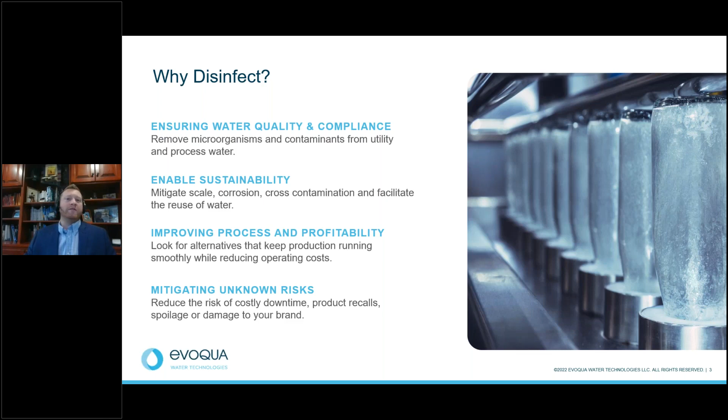Inline validations are simplified and easier to achieve by the known performance, which results in operating confidence. To overcome the challenges in a beverage processing plant, high quality, reliable disinfection systems that make their process repeatable are critical. Facilities cannot have a value outside of the regulatory ranges, as these hits jeopardize their product and pose a risk to health and safety of the consumers. New regulations are driving precision in the final safety and quality steps before bottling.

When reliability is limited, easy and quick maintenance is not possible, which drives up costs and creates more risk. There is constant pressure in facilities to prevent downtime and increase uptime to maximize their profits. With this, there is the challenge of how they can effectively gain feedback on their process and reliably validate this for reporting without compromising the time of the operators. Also, how can they balance the cost to operate by establishing a process that has less downtime to disinfect, more uptime to produce the product, thus increasing line utilization, optimization, labor, and material costs. For these facilities, what it really comes down to is a desire to focus on production of their product only, and not have to handle or solve the disinfection and sanitization needs.

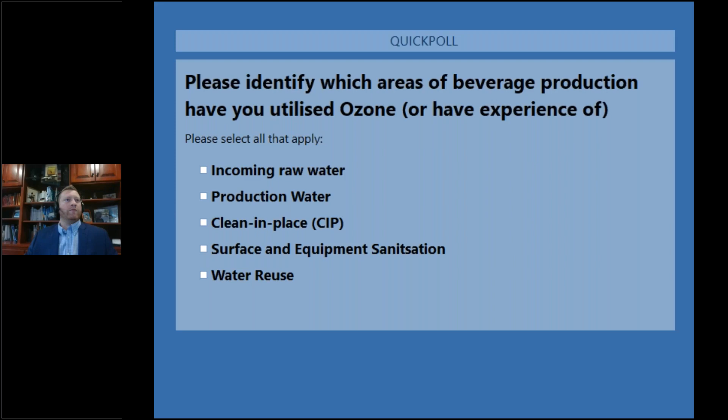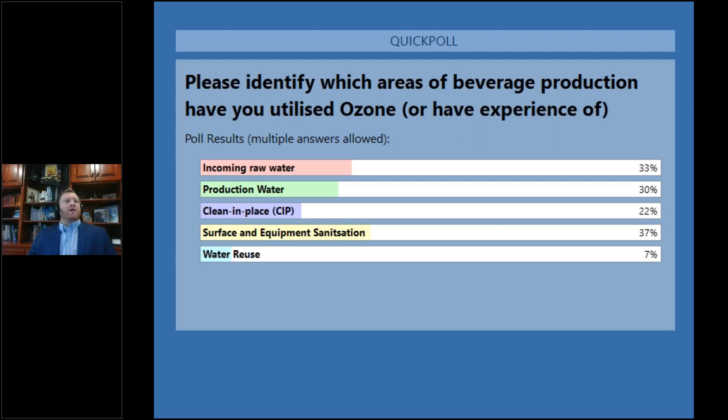As we were talking about the challenges we're seeing, you could guess that disinfection really can be the solution to these challenges. At Evoqua, the different disinfection technologies that we have are our ozone systems, UV, OSEC, analyzers and controllers, gas feed systems, and chlorine dioxide generation equipment, and more. Today we're focusing on the exciting topic of ozone disinfection.

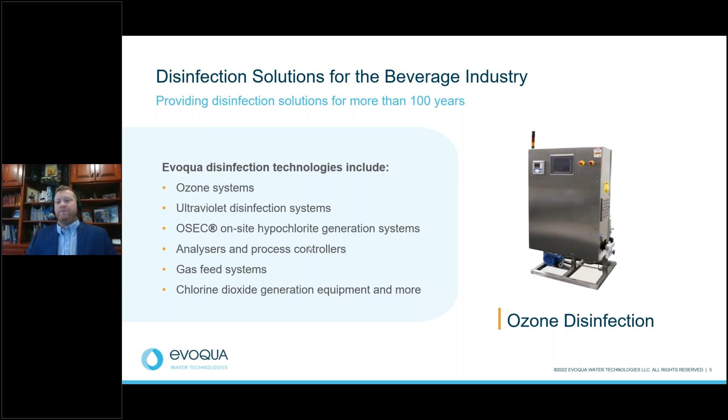We have seen, and this is echoed by operator feedback in our experience, how successful ozone applications can be. Throughout this presentation, we will see how ozone has the ability to reduce annual water consumption, in some instances more than you even thought possible. Even though the core elements of on-site ozone generation are air and electricity, best practices with ozone can actually help reduce the power consumption at your facility compared to some of the more traditional methods of disinfection.

With the quality improvements and increased reliability, ozone-based applications can see a reduction of annual process downtime, allowing you to produce more and be more efficient. The simplified designs of ozone systems, especially packaged ozone generation systems, can minimize maintenance, allowing your team to focus on your products and not worry about disinfection needs. And last, but maybe most important, the quality of your product will not be compromised with ozone. On the contrary, we've seen great success with customers who have reduced or eliminated microbial hits and have been able to distribute and sell more product without compromising quality when using ozone in their facilities.

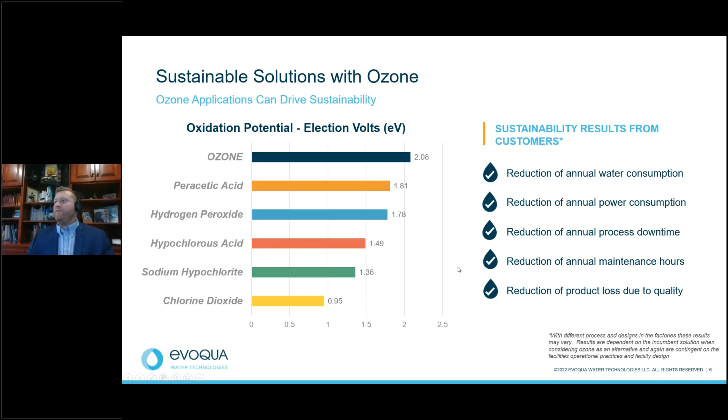For most beverage facilities, there's a growing need for sustainability. These facilities can leverage ozone to reduce water consumption compared to heat-based or chemical-based treatments. For annual water consumption in this facility, using a 5-step CIP ozone process, you can reduce annual water usage by 20% compared to chemical sanitization, or even more, 25% compared to hot water sanitization. Using a 1-step CIP process with ozone allows the customer to reuse their water source, reducing annual consumption of CIP processes by 93% compared to chemical sanitization, or 94% compared to hot water sanitization.

These calculations are based on a 4-cycle CIP process and may vary facility to facility. But what's really important is that when looking at a multi-cycle process, the ability to reuse water, which can be achieved with ozone, can significantly reduce water consumption.

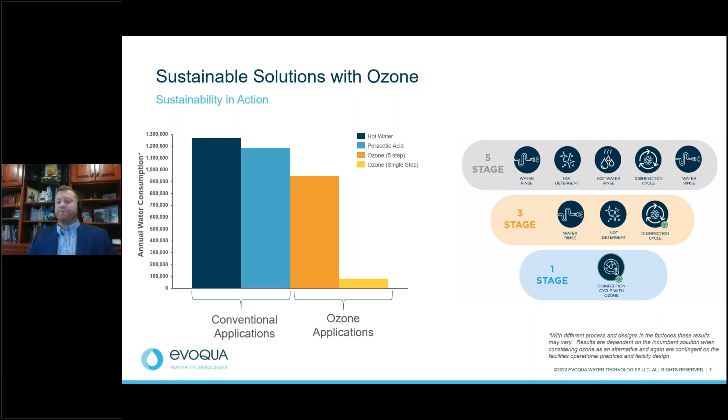Ozone can be used in many ways in the beverage industry for disinfection against microorganisms. These include water intake and processed water, product water production, disinfection of process equipment to prevent spread and contamination, surface cleaning and disinfection including disinfection of bottles, especially reusable bottles in the wash prior to bottling, disinfection of wetted parts of the water bottling equipment and machinery, disinfection of the surface of bottles and sealed caps of bottled water, and disinfection against airborne microorganisms that may be present in the air above the water bottles.

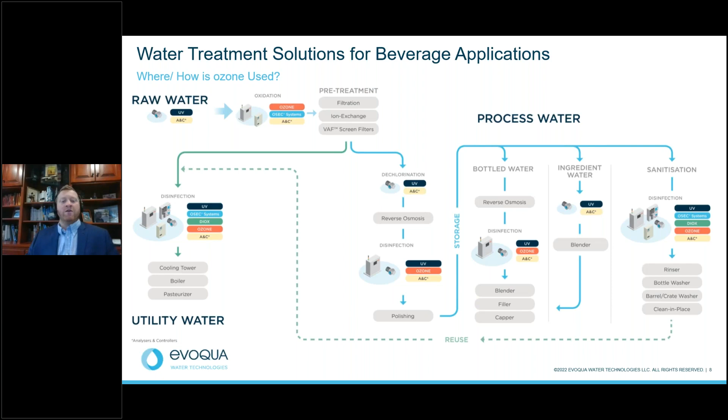So now we'll move into our second poll. Very similar to the first one, we're now looking at the future state. Please identify which areas of production you anticipate ozone being used in the future.

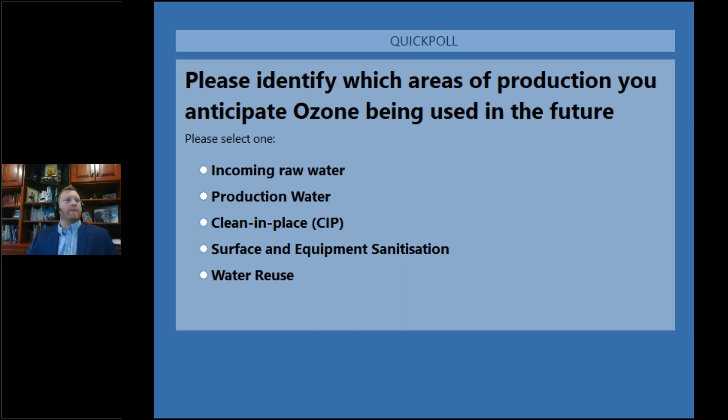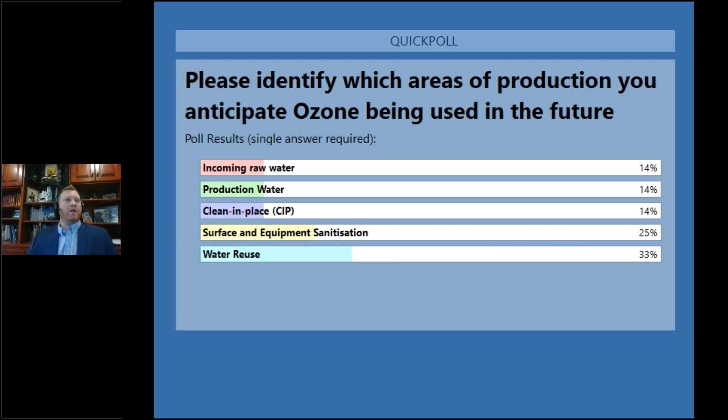It looks like we're going to be seeing a lot more people interested in surface and equipment sanitization and in water reuse in the future, which is very exciting. So with that, we're going to start to walk through some of the applications we see ozone being used in beverage facilities, starting first with water intake and processed water.

As we know, water is part of the product, if not the product itself, and water is used for several steps in the production and cleaning process. For many facilities, a key to sustainability is using non-potable water to reduce demand on local municipalities. Therefore, this processed water must be free of pathogens or impurities that could risk human health or product spoilage as it comes into the facility.

There is also an increasing need for process and product water to be treated to higher standards with additional unit processes to increase production cycles achievable before cleaning. Spent processed water is increasingly seen as an opportunity for point source reuse or to be used elsewhere in non-beverage contact applications such as washdown or CIP.

Wastewater reuse is growing in popularity as a source of utility water makeup, further reducing the freshwater needs of the facility. With all of this, the challenges of disinfecting the water are critical to the operations of the facility so that they can meet their production goals. With this, we see customers looking for solutions that are simplified and improve production uptime with less maintenance. They're also looking for solutions to automate the processes and ensure reliability in the facility while providing this sustainable solution.

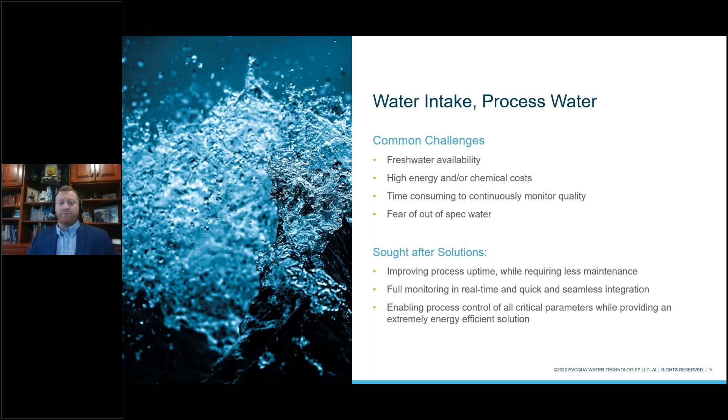With these needs in mind, Evoqua was able to provide one complete and self-contained package generator system to a bottled water filling process in California. This delivered a safe, tested, and qualified solution offering verifiable results via real-time monitoring of concentration. This solution offered key safety by keeping ozone off-gas below the minimum levels while still maintaining the HACCP regulations for bottled water.

This was achieved with the trouble-free approach of the package generator system. When leveraging ozone disinfection, it is important to dose the right amount of ozone for sustainability, quality, and safety. This can be achieved with real-time monitoring of the treated water by utilizing an integrated control logic to chase the desired residual set point. With ozone being generated on-site, it can reduce production downtime as you can ensure you have the level of disinfection when you need it, creating a reliable solution.

This simplified solution helped improve the customer's efficiency, driven by their sustainability goals, and with a short-term return on their investment.

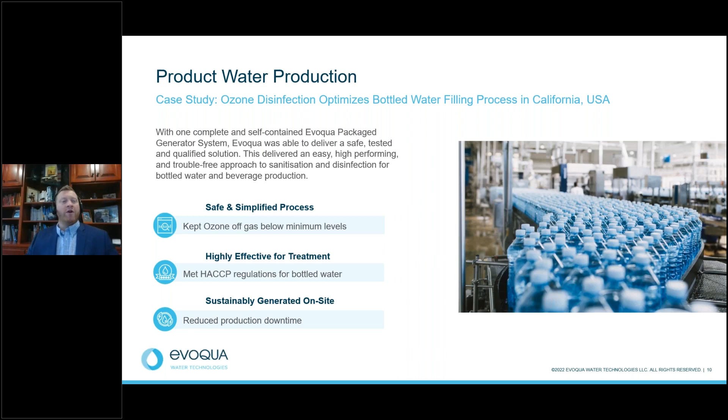Another application here is clean in place, also known as CIP. This is the method for cleaning the interior surfaces of pipes, vessels, and process equipment without disassembly. The washing process traditionally consists of several cycles in which detergents, caustic, acid, and rinsing materials are recycled through the process equipment via an automated system of tanks, valves, pumps, and heat exchangers, all managed by a programmable controller.

So again, there's a lot that typically goes into these applications to really help drive the reduction of labor and the disassembly of the equipment to still provide the disinfection.

Now, while conventional chemical CIP significantly reduces the time and cost of system sanitization compared to manual cleaning, elevated temperatures and chemical detergents are often required for complete effectiveness. As a result, significant amounts of energy, water, and chemicals are consumed in traditional chemical CIP processes.

Solutions, therefore, need to prevent the spread of contamination and reduce the risk of microbial growth in product water, or even the potential of recalls, which are becoming more and more prevalent nowadays. Consumers and users are also looking for solutions that are sustainable and environmentally friendly, where the runoff water is extremely clean but can still provide overall plant sanitization by reducing overall microbial load.

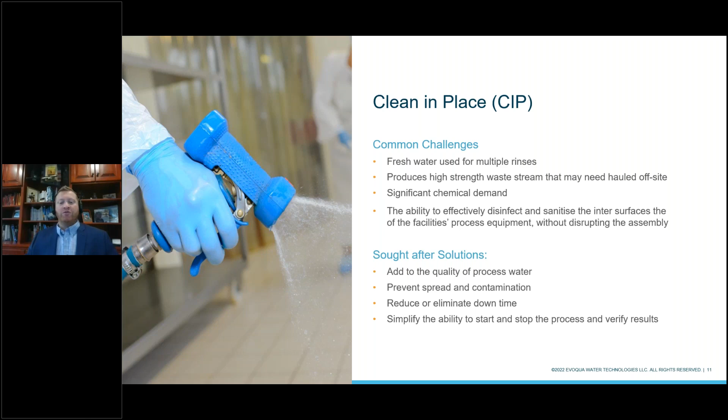So with that, we look at an example here where ozone injected water can improve the effectiveness of CIP because it is a very powerful oxidant and works well at reduced temperatures. Conventional high temperature CIP processes require significant energy and time to ramp the entire system up to the target temperatures and then cool down at the end of the process.

Ozone injected water can replace chlorinated sanitizers, peracetic acid, and hot water rinse in traditional CIP protocols. When ozone replaces chlorine, hot water, and steam, it can save energy and reduce the carbon footprint. It reduces the chemical usage and challenges associated with the disposal of these chemicals, and it can reduce storage risk, because the ozone is being generated on demand.

This can result in a solution that can be 20 to 85% less expensive than hot water sanitization based on the weekly needs of the facility. In addition, the use of ozone can significantly reduce downtime via the length of time out of service, even with a CIP process.

So looking at the CIP processes from a traditional standpoint, for hot water use, the process can be about 3 to 6 hours of downtime. For chemical processes, this downtime can be 2 to 4 hours of contact time, but overall, sometimes more than 12 hours of total time.

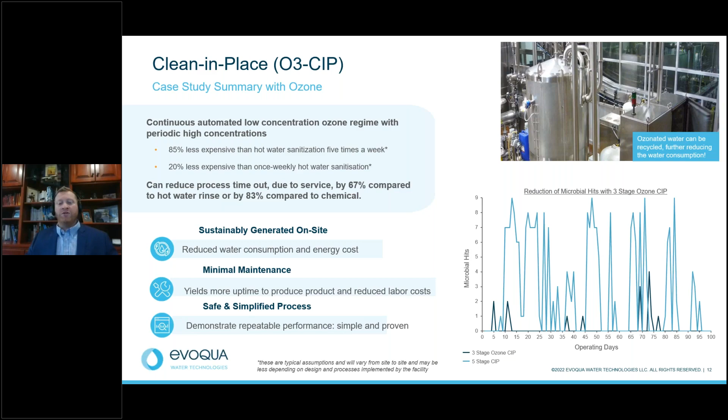And then the last application here is in surface cleaning and disinfectant. Surface cleaning and disinfection is a critical part of meeting the quality and regulatory needs of a facility. Today, many plants depend on chemicals to achieve these values, which can be costly and have many other impacts on downstream applications. Thus, we see customers in this market looking for alternative solutions that leave no residual, which ozone does with its short half-life, while still producing the disinfection to ensure the quality of the product.

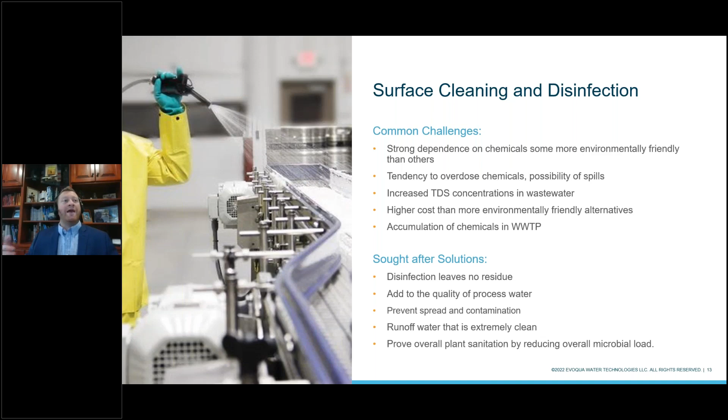The desired solutions here are very similar to those that we just talked about in the clean in place process, but it's really important to think of this part separately, because microbial hits on the surface of the process can have just as much of a negative impact as a hit on a process line. So when thinking about disinfection in your facility, it's important to think about all the places where disinfection should and can be used to help reduce microbial hits.

So when using the ozone generation system versus a traditional foam process, we can actually see some clear savings in water and time for that application. At one of our sites, the customer was looking to replace their surface disinfection process for their 4 fillers. The incumbent foam process required 2 rinses at about 1,300 liters per rinse and at 3 different passes.

When we then switched it over to our ozone-based application, that process required only 1 pass at about 1,900 liters. Also comparing them from a labor perspective, the foam process's 3 passes required 7, 8, and then 7 minutes of cleaning, while the ozone process only required 1 pass at 10 minutes, which again was applied over the 4 fillers. The net here was that the customer was able to save over 3,000 liters and 48 minutes of labor with each filler cleaning cycle.

So you can start to think about over the course of the year how much that will add up in sustainability efforts, cost reduction, and labor reduction, allowing the team to focus on what's most important in their facility. And for another key account customer of ours, we were able to monitor a continuous 24/7 low concentration ozone regimen with periodic high concentrations. This approach provided significant operational improvements, including clear ROI to heat-based treatments, thus demonstrating how sustainable ozone applications can be by reducing water consumption and energy costs.

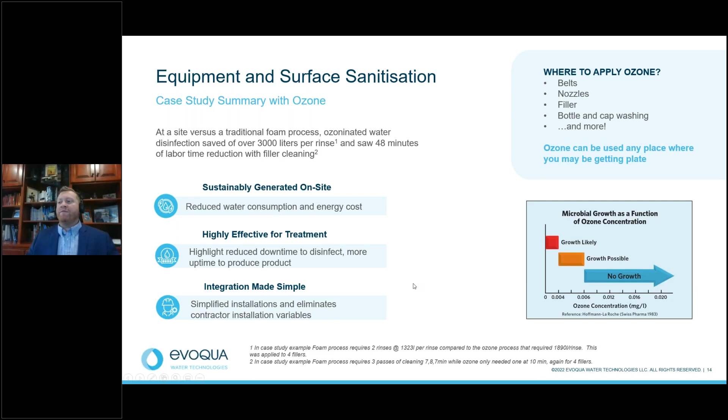So you may ask, where can I apply ozone? Well, it can be on the belts, the nozzles, the fillers, the bottle and cap washing, all ones we've been talking about here. But it's better to really think of it this way: ozone can be used anywhere you may be getting microbial hits or have risk of getting microbial hits. And in that regard, you can really start to think about how you can improve the overall quality and performance of your facility by leveraging ozone.

With Evoqua's Pacific Ozone Solutions, there are 4 core values that our product delivers: safety and control, measurable results, sustainability, and a simplified operation. When it comes to safety and control, we at Evoqua always strive to deliver. This is a core pillar of our company and has been proven in industry with ozone-based solutions. On-site ozone generation allows the generation of a powerful disinfection without having to handle chemicals, which can improve safety in almost all facilities.

Our technology provides measurable results that can and have been verified and validated, allowing for repeatable processes when it matters most. Ozone disinfection can deliver known results time after time with minimal effort to the operational process. Our ozone systems offer a sustainable solution, allowing you to reduce costs associated with maintenance, improve production by increasing uptime, all with a simple to use product that minimizes the resources needed to generate ozone.

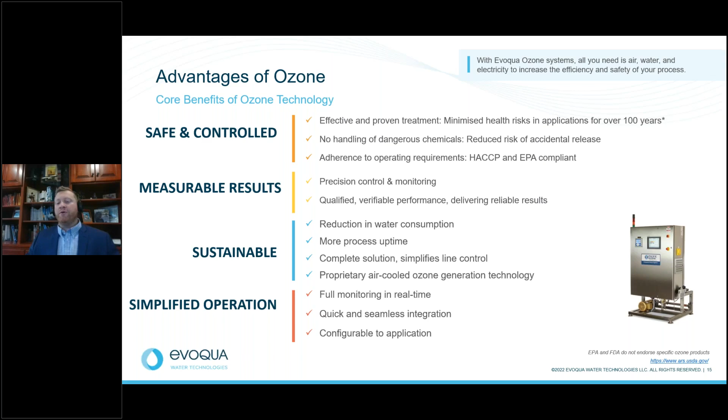Last, Evoqua's portfolio is engineered to provide full monitoring to meet even the strictest operational requirements and can seamlessly configure to almost any application. In short, we offer simple, proven ozone technology.

So with that being said, now we're going to move into the panel discussion. And I'm pleased to introduce our esteemed ozone and beverage experts with Don Lanini, Jackie Schramm, and Sueli Bacchus-Roll. So as we're going through these 2 questions here, I do encourage you all to start posting some questions into the chat box here, because after we go through these 2 questions, we'll open up to a broader question and answer session with these experts. So at this time, I'll invite the expert panel here to come on camera, and then we can go through with the first question.

So I'll bring the first question up here of, what considerations should producers take to ensure disinfection requirements are met where safety and quality are critical? So Jackie, if you could start us off here. Yeah, I can definitely start you off. Some of it you touched on in your presentation. It really all starts with the air prep, what the feed gas is going to be into the ozone system. So we want to make sure we have clean, dry, compressed air or oxygen that we're sending into the ozone generating cell. Then we generate the ozone in the ozone generating cell.

And the next piece is the mass transfer system. You really want to make sure that that mass transfer system is efficiently dissolving the ozone gas so that you're getting it to the application point. Once you get everything dissolved into the water and out to the application, there's some other technology built into our machine, which Don will go into.